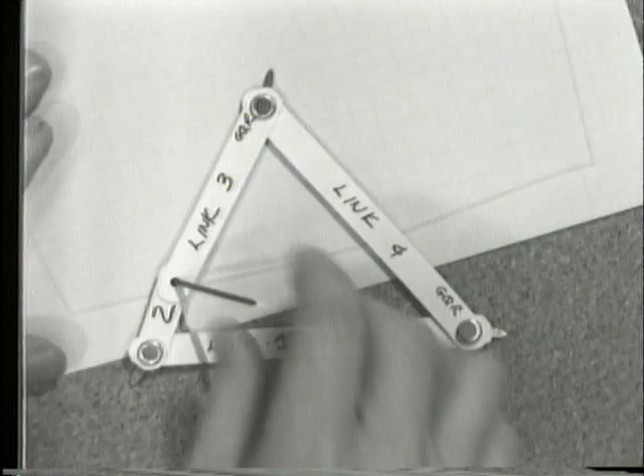Let me get it set up here, and we'll get the camera on it. See if I have it there. That's not too bad. Let me stick this down here.

Now, what we have here is a little 4-bar linkage, which you should be familiar with from your earlier lectures or tapes in ME 2310. I've labeled them link 1, which is the ground link, link 2, which we'll call the crank, link 3, the coupler, and link 4, the rocker.

That's the simplest and most basic 1 degree of freedom mechanism that you can have. Now I'm going to articulate this by putting a nail in that pivot and holding the nail with the pliers to keep my hand out of the picture.

And I'm going to move the crank in its motion. It's stubbing its toe on the fasteners there. And you can see that the crank can make a full revolution.

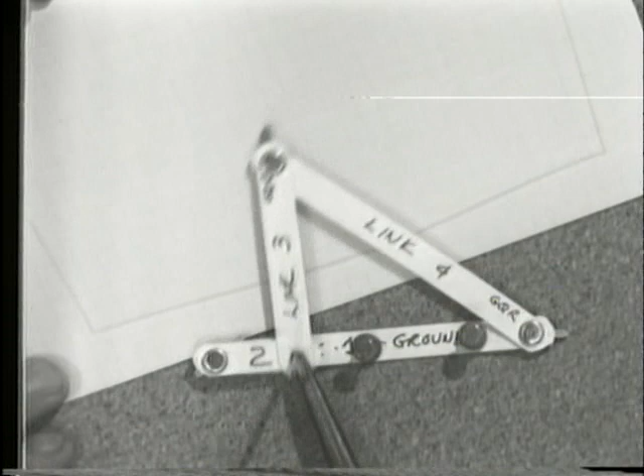This is a Grashof 4-bar linkage. If you don't know what a Grashof linkage is, you ought to go read the text about that. It's very important to understand why the Grashof criterion predicts that this will, in fact, make a full revolution.

Notice that link 4 is oscillating back and forth. That's called the rocker. I want to stop this in that particular position, which is the extreme position of link 4, and make a mark right there. Now I'm going to move it around to the other extreme position of link 4 and make another mark.

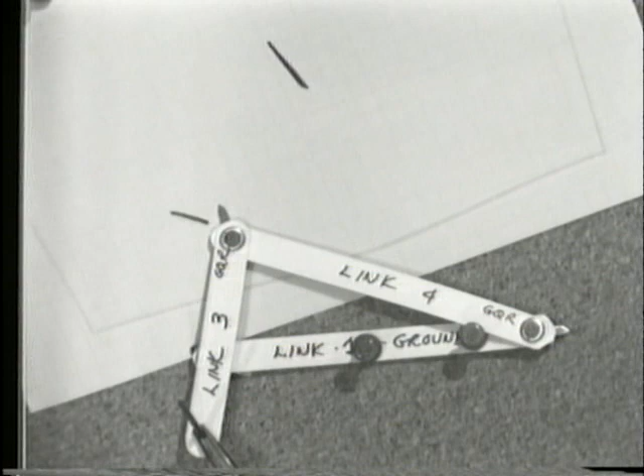While I'm doing this, make note of something you should already be aware of, namely that in the extreme positions of link 4, this position and that position, links 2 and 3 are collinear. Notice that they are on the same straight line. That, in fact, defines the extreme positions of link 4.

Now, notice the motion of link 2 as I move it from this position. We'll call that the far position of link 4 back to the near position of link 4.

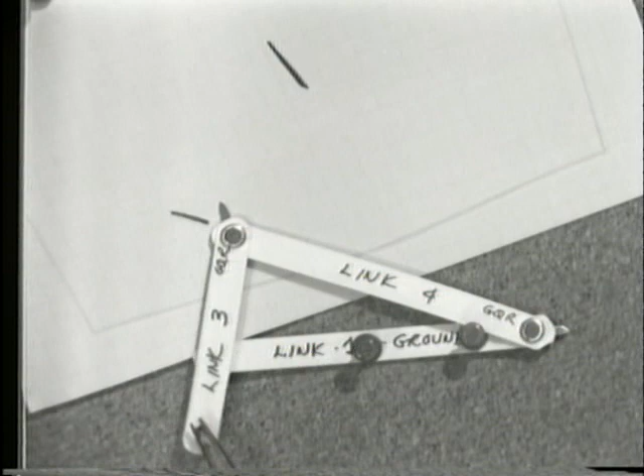Now, I think I may need to bring some paper around the other side so that I can make a mark here. Let's slip a piece of paper under there. I also want to make a little mark right down here. Get that in the right position.

That's in an extreme position of link 4. I'm going to make a mark for the position of link 2. And I'm going to move back to the other extreme position of link 4, and I'm going to make another mark right there.

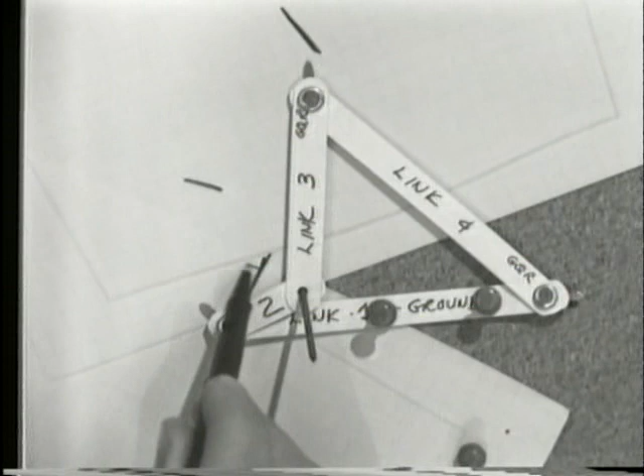Now, this does not have a very extreme quick return action, but what I want to demonstrate here is that this angle of crank rotation, which I'll call beta, is not 180 degrees. And if it isn't 180 degrees, then its supplement over here can't be 180 degrees. In fact, alpha is less than beta. And that's what makes this a quick return mechanism.

You see, when link 4 moves from one extreme of its possible positions to its other extreme, the far to the near, link 2, which is the driver, perhaps being turned by a motor in a real case, does not go through the same angle.

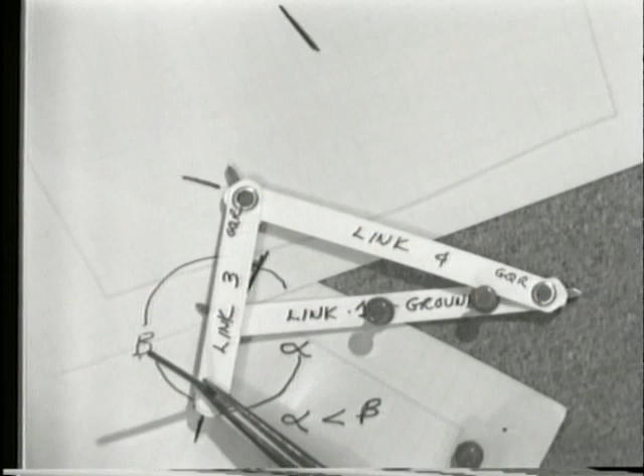If I'm driving link 2 with a motor running at constant speed, then running it through a larger angle takes longer time. So if I rotate link 2 in the direction I'm now rotating it, clockwise, then it takes longer to get from the near position of link 4 to the far position than it takes to get from the far position back to the near position, simply because link 2 is going through a smaller angle on the return trip. That's where the linkage gets its name, quick return. It does a quicker return from its far position to its near than it takes to get over there.

Now, all kinds of applications for this exist in machinery, such as moving a part from one workstation to the next, during which time you are not doing any work on the part, therefore you would like to get it there as fast as possible, and then perhaps moving the part in the other direction under a controlled condition so that you get an appropriate velocity profile or some such.

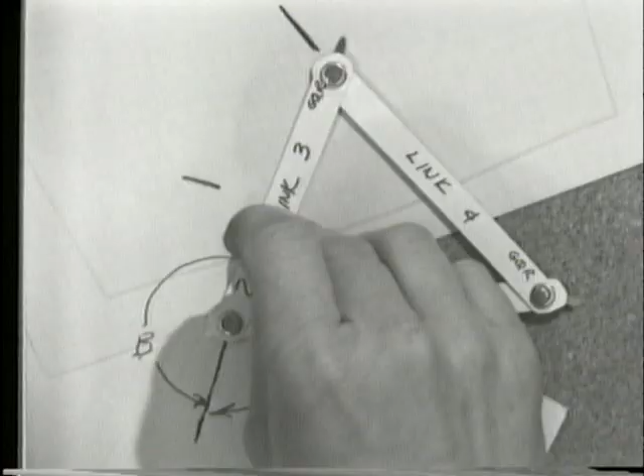So you quite often want to do work on the part as it moves from one position to the other, and just get it back. Perhaps the carrier is empty by that time, or you've dropped the part and want to get back and pick up another as fast as possible. Now, as you can see, there isn't a very extreme ratio of quick return here, and the kind of linkage I'm showing you is somewhat limited in that respect.

I'm going to show you two types of linkages here that will give you a quick return, one of which is a little bit simpler but has some limitations, and the other one is more complicated but does offer some advantages in terms of its ability to give you larger time ratios.

So the first one I want to describe is this Grashof 4-bar quick return mechanism, which is the one I was just demonstrating to you.

That will have a time ratio, which we'll call Q, which can be defined as the time it takes to go forward—and by forward I mean motion of link 4, let's say arbitrarily to the right, we'll call forward, and call this back—over the time it takes to come back, also stating that the omega of the crank is a constant, K.

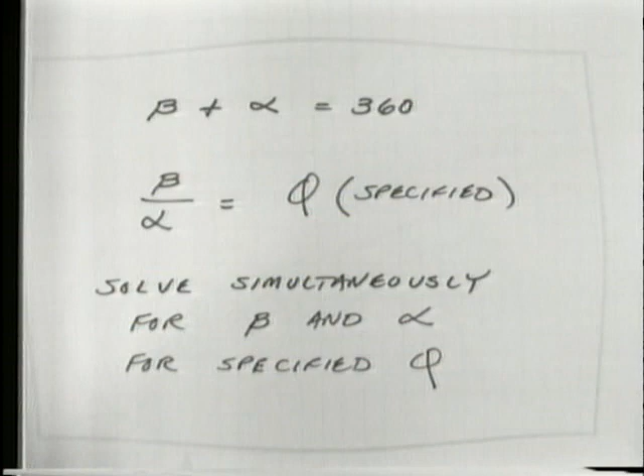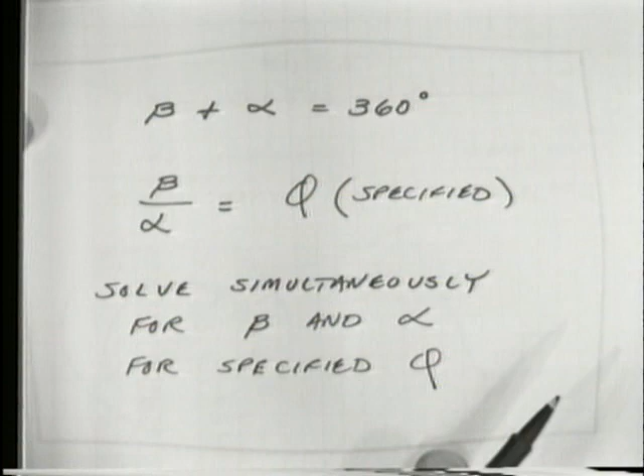That's a very simple procedure, since it's obvious that the sum of beta and alpha must be 360 degrees, since they together comprise one rotation of the crank. Also, since from the definition of the time ratio, beta divided by alpha is the value of Q that you would like to have, and that's your choice, you can solve those two equations simultaneously, and you're going to have a value of beta and a value of alpha appropriate to your particular case.

Now, the advantages of this particular approach, namely the 4-bar Grashof quick return mechanism, are that it's simple—there are only 4 links, it's relatively compact—but it has one distinct disadvantage. Only small time ratios are going to be possible without running into some fairly severe geometric limitations of bad transmission angles and rough running. So a reasonable rule of thumb is that you'll have to keep your time ratio less than 1 1/2, and that may not suit your purposes. But if that is acceptable to you, then it's a reasonable design approach.

So what I'm now going to do is show you how to synthesize a Grashof 4-bar linkage for a particular time ratio. And the time ratio that I'm going to use as an example will be rather small, 1.18 to 1. I'll make a note of that up here, 1.18 to 1.

And rather than take the time right now, I've already calculated that that's going to give me a nice even angle, which I'll have available on a triangle, so it'll make it easy to construct.

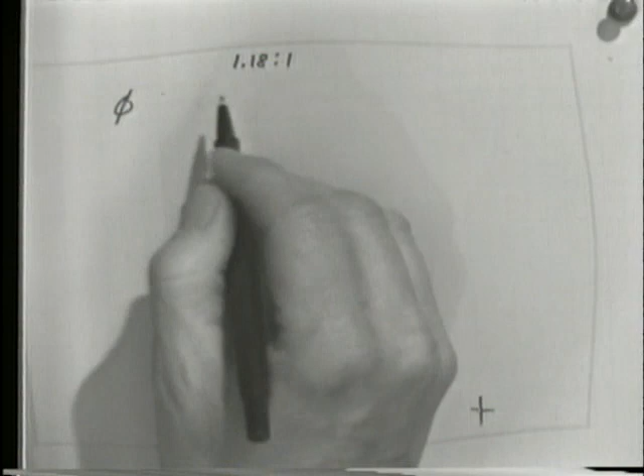And phi is going to be defined by this expression right here. Q is our time ratio, and that's, as I said, 1.18 in this particular case. This relationship will allow me to determine the angle phi.

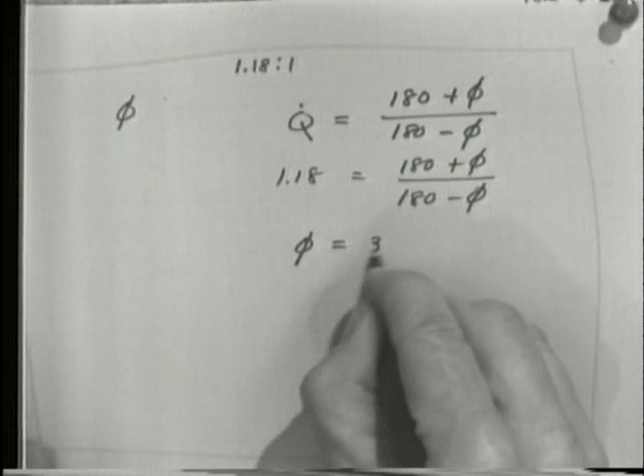Very simple relationship. So if I substitute in my 1.18 for this, I'll leave it to you and your calculator to satisfy yourself that my answer is correct, but phi should turn out to be 30 degrees, which is convenient if I'm going to use a triangle to do the construction here. But you appreciate that you could choose any value of Q that you wanted up to the reasonable rule of thumb of 1.5 and get the appropriate angle of construction here.

Now, having determined this value, let me show you how to go about constructing the linkage with that particular ratio.

Now, where do you start in a design problem? That's always the most difficult decision to make. You don't have enough information in any typical real-life design problem, so you have to make some assumptions. And you usually will know enough about your desires or the problem at hand that you can make a reasonable stab at a start to the problem.

What I'm going to suggest here is that we invent a situation in which, for one reason or another, we've decided that we would like the output end of our linkage to move through an angle of 30 degrees, let's say. I'll pick that because I have the triangle available, but it could be anything you like.

Now, I have to pick a pivot, and I'm going to pick a point right there on my sheet. Having done this in advance, I'm going down to the lower corner to make sure I stay on the paper, but you could literally choose it anywhere. If your paper was big enough, you wouldn't have any problem finding the proper locations of all of the other things.

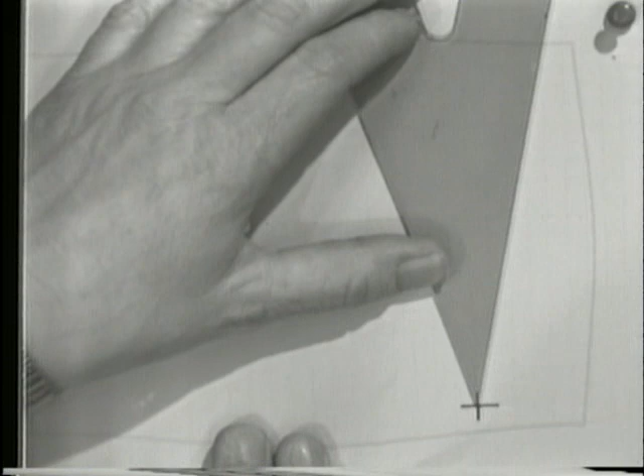Now, since I said I wanted 30 degrees of motion, let me show a little pin there. This is going to be a pivot for my output link. And notice another thing here, which is fairly common in designing linkages, in that I'm starting at the output end and working backwards.

This happens largely because you tend to know more about what you want the output end to do than you do the input end, since that's the business end that's going to do the work for you, and you would like to have it end up being something suitable to your machine's needs.

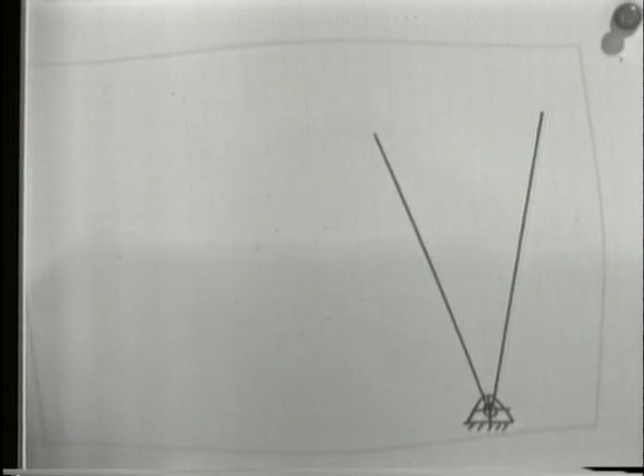I'm now setting my compass to a particular radius, which I'm choosing arbitrarily. But again, this radius, which is going to define the length of link 4, I've just drawn link 4 here. I'll darken that arc in because the pencil doesn't show up too well here.

And I'll have to give these some labels here. Let's call this point B1 and call this point B2. It's the same point in two different positions of the link. And I'm going to add some meat to that link so it will look a little more realistic. So this perhaps would be a hunk of metal with holes drilled at either end, and it is link 4.

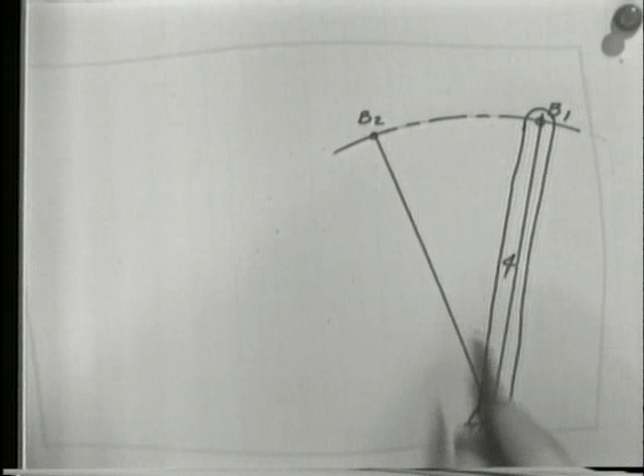Now, up to now, everything I've done is entirely arbitrary. I've chosen the angle 30 degrees through which the output link is going to move because that's what I wanted. And I've chosen the length of link 4, this distance from B1 to—we'll have to give this a name down here—call this O4, the pivot of link 4. I've given those dimensions here quite arbitrarily, but your machine packaging would dictate in the real world just what those should be.

Now, having made that much of a stab at my design, at least I show the output end, and this being my rocker, I want to force it to go from B1 to B2 and back to B1 and so forth forever and ever. However, since we're after a quick return, which direction I call return and which I call forward is quite arbitrary as well. Let's say that that's the return and that's the forward. So I wanted to come back quick and move forward slowly, back quick, move forward slowly, and so on.

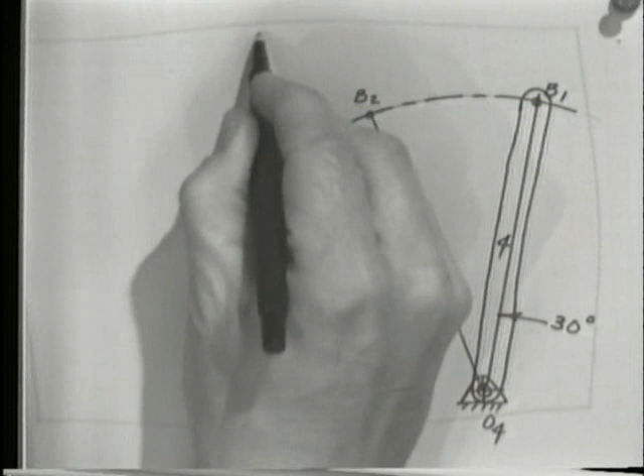That's the ultimate aim. And the ratio, I've decided I want to be 1.18 to 1. So it's going to take 1.18 times as long to go forward as it takes to come back.

That's what that means. The next step is to utilize the angle that we just calculated, and I'll refresh your memory as to what that was if I can find it here. I don't see where I put it very quickly, but that was the calculation I did for the angle called phi, which is equal to 30 degrees in my particular case. Well, I think it's under here. I didn't move it. There it is right there. Can you see that?

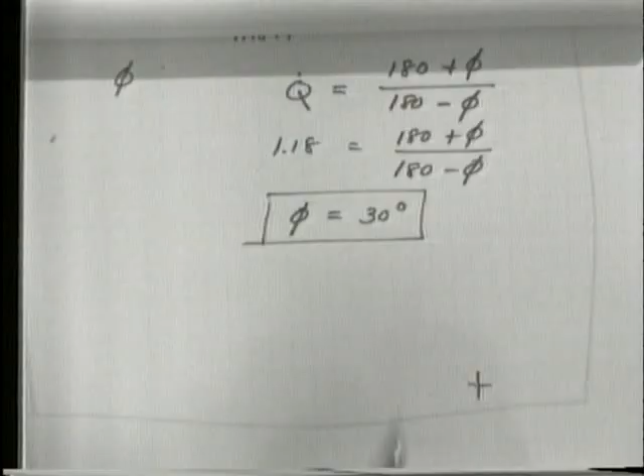This came out of the time ratio of 1.18 to 1, substituted into this formula and solved. There's only one variable in there, phi, and it's 30 degrees. Okay, back to our diagram. Now what I'm going to do is also quite arbitrary. I'm going to draw a line, any old line, and theoretically you could make this work by literally drawing any line.

Some will work better than others, and I'll take advantage of a little experience here and make it go off to the left, which is as much because I have paper available there as anything else.

That line now is a construction line. It isn't really part of our linkage, at least not yet. I've chosen it at a relatively arbitrary angle. It's not too far from 90 degrees to this position of the link, but that isn't required. It doesn't have to be a right angle.

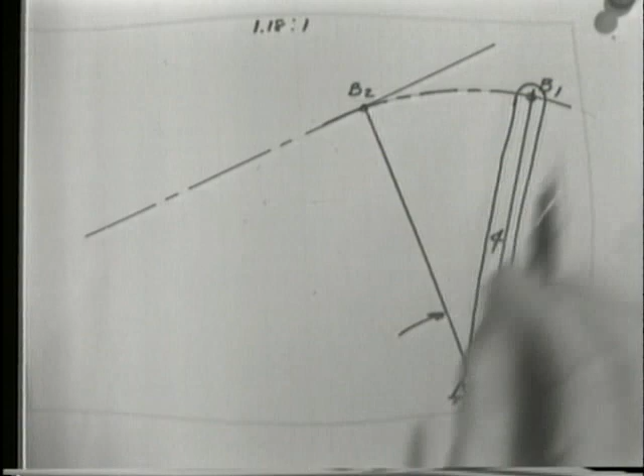The angle phi is now going to be used to draw a second line, which is going to pass through B1, which is the same point in the other position. This second line passing through B1 will subtend the angle phi with respect to the arbitrary line I just drew. So that means I need

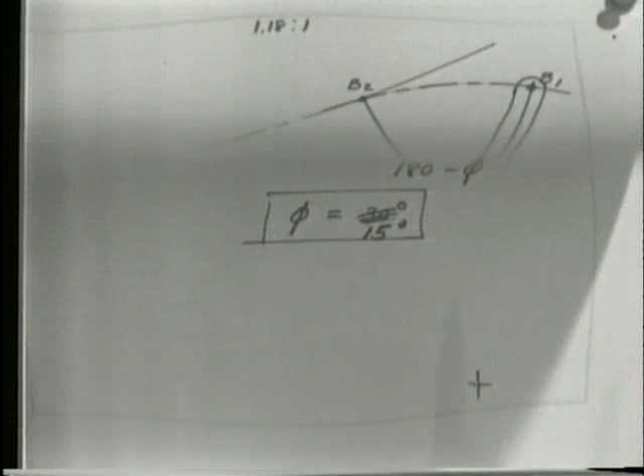to construct a line at not 30 degrees. I just noticed that I read the wrong number. I beg your pardon, that is 15 degrees. If those of you who were quick enough with your calculator between the time I showed you this and this point have caught me, you know that this angle phi for 1.18 ought to be 15 degrees, not 30 degrees. Sorry about that, but we're on the right track now.

With a 15-degree construction angle and a 30-degree triangle, I have a little bit of a problem here. But what I can do is draw a line that is at 45 degrees to this line right here. I also happen to own a 45-degree triangle, so that's fairly convenient.

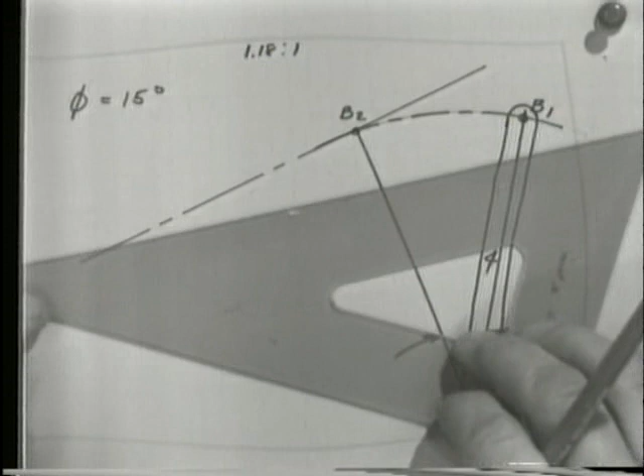I'll draw a 45-degree line down here, and I'll use that as a base, as a reference, to lay my 30-degree triangle on. Notice down here I'm just going to use that as if it were a straight edge. And I'm going to put my 30-degree triangle along that line and move it along until the other side, the 30-degree edge of the triangle, goes through B1.

Since 45 minus 30 is 15, this angle right in here is 15 degrees, which is my phi. Now, phi is not an angle that's going to appear on our linkage. It's strictly a construction aid. And I used that angle phi, which came out of the calculation of that formula,

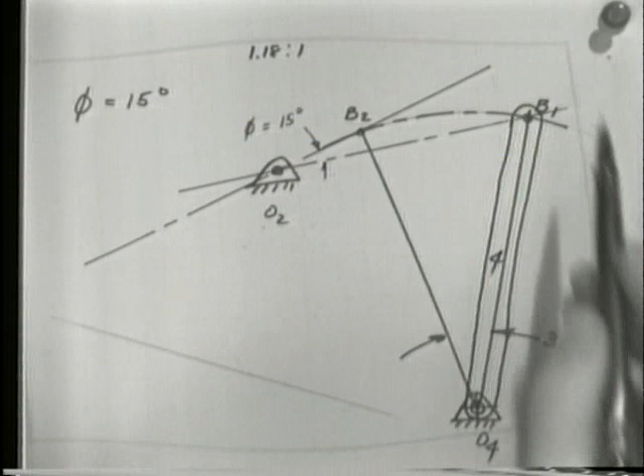to find this intersection right here, which is going to be the pivot for link 2. So I'll label that O2. Now, that pivot O2 is where link 2, the crank, is going to pivot to ground. How did I find it? I simply drew an arbitrary line through here and another line, not really arbitrary this time, but a line at 15 degrees to the first arbitrary line through B1. Where they intersect is point O2.

The next step is to find how long the crank should be. Remember the demonstration at the beginning of this tape, which I'll redo right now very quickly to refresh your memory,

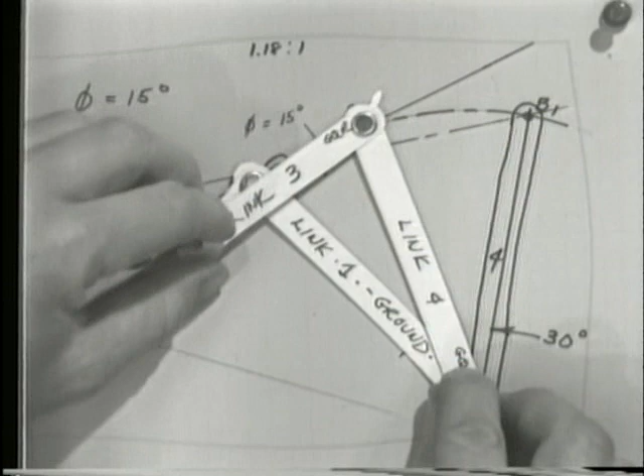which said that when link 4 is in its extreme position, 2 and 3 are in line, they're collinear. And when link 4 - I should do it this way, I guess. That corresponds more or less to what we've got. And when link 4 is in its other extreme position, 2 and 3 are again collinear. So I can make use of that condition of collinearity now to find the length of crank.

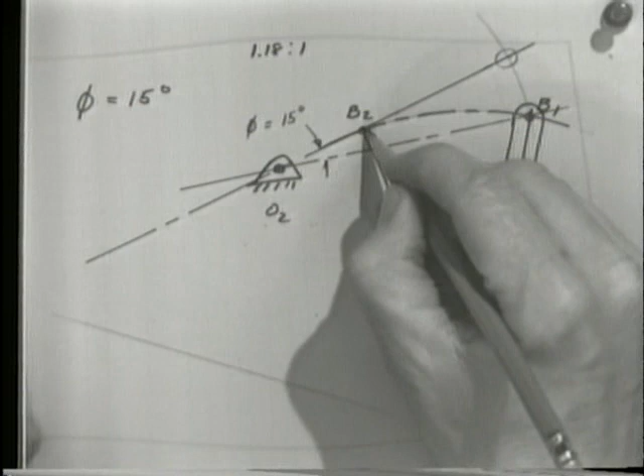And the way I'm going to do that is as follows. I'll take the center O2, which is my crank center, set the compass to B1, to the length O2 B1, strike that off as an arc until it intersects over here on the line O2 B2 extended. Now all I've done is projected the distance O2 B1 around onto the line O2 B2. The purpose of that is to determine this length right here.

We've got to give this a name, I guess. Let's call this C, construction point C up here. The distance B2C, let's write this down over here, B2C is equal to 2 times the crank length. I'll call that R2 - it's going to be link 2, and it's the radius of link 2. So if this distance B2C is twice the crank length, then all I have to do is bisect that line.

And you should remember how to bisect a line with nothing but a compass and a straight edge, a la Euclid. So we'll just draw a couple of arcs. I'll do this in pencil since we don't really care about the lines other than to find this point right there.

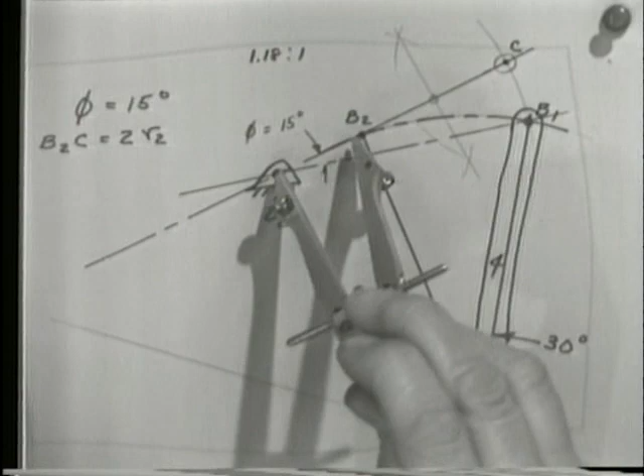I'll bisect that line. Now I can set my compass to the distance, which is half of B2C. That's going to be my proper crank length. And now I will draw around my crank center O2 that circle, which represents the locus of the end of

crank 2. So at least now I have the radius of crank 2. The only thing remaining to be determined, since I have link 4, I have the length of link 2, and I have link 1, do I not? Where is link 1? Link 1 is the ground plane, the paper. And if I have found the location of the pivot O4 and the pivot O2 on the ground plane, then the distance between them, which I will draw in as a dotted line here, is link 1.

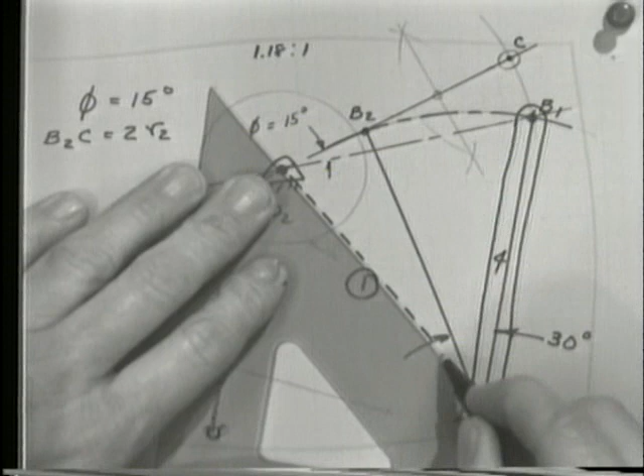It is a 4-bar linkage. Often we draw them looking as though they have only 3 bars because the fourth bar is the thing on which we're drawing it, the paper or the ground plane. So I have link 1, I have link 4, I have at least some information about link 2. What remains is to determine link 3.

Well, again, we have to make use of the relationship that says that the extreme positions of the output link 4 are determined by the situation in which links 2 and 3 are collinear. That's one arrangement, and flip it 180 and you've got the other. So I can take advantage of that relationship to note that when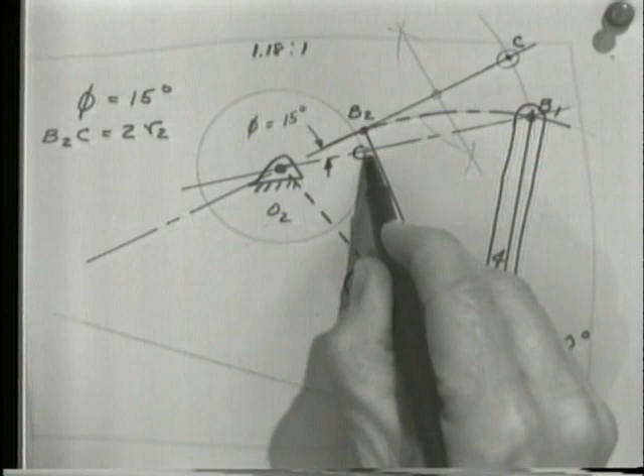link 4 is over here at B1, since link 3, being the coupler or connecting rod, connects 4 to 2, and since the locus of 2, the end of 2, is that circle, and we have to be collinear, then that point right there is the connection between link 2 and link 3 for the position shown of link 4 over here. I'm going to draw that in solid. So for the position shown for link 4, here's my link 2 and link 3. There's 3 and there's 2.

Notice that 2 and 3 are collinear when 4 is in its extreme position. Why is that the extreme position? Because that's where I started. I said I wanted 30 degrees of travel on the part of link 4, and I very arbitrarily stuck it there. I could have put it anywhere else. And all of this would have changed as a result.

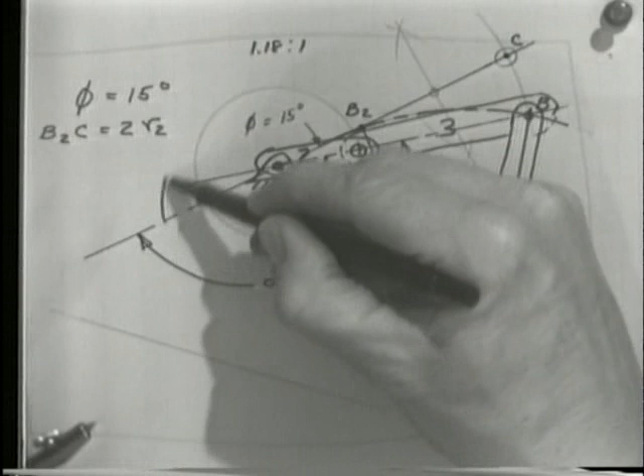Now, the other extreme position of link 4, which is point B2, will occur when 2 and 3 are again collinear. Well, in order to have my time ratio of 1.18 to 1, notice here is my alpha, and here is my beta from my time ratio.

And alpha, or beta over alpha is the way I had it, is 1.18. And you can check my geometry on that. If I haven't made another mistake, it should be that this, when this angle is 15 degrees, that was our phi. Beta over alpha will be the 1.18.

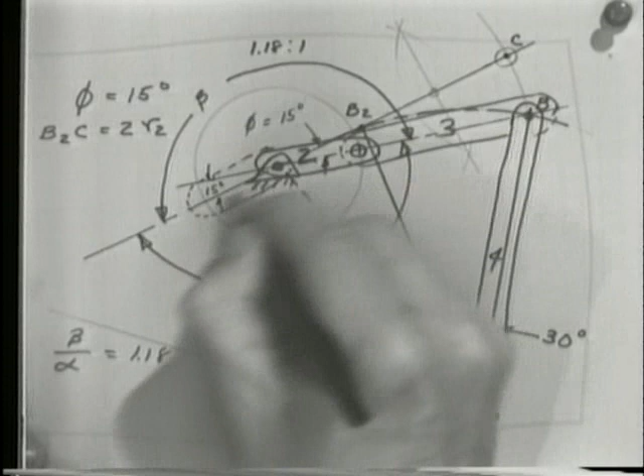Now, I want to check one thing before I give up on this, and that is that I haven't chosen an inappropriate length for link 3. I'll set my compass to link 3's length, and if, in fact, I'm going to have this beta over alpha ratio, then the other position of collinearity, namely there, when link 2 and link 3 are lined up.

It's getting rather messy in here with all these lines, and perhaps a little hard to see, but that's one of the problems of laying out linkages. This distance, link 3, since the link doesn't change length, has to be the same here as it is here, and you can see that it is within my graphical accuracy.

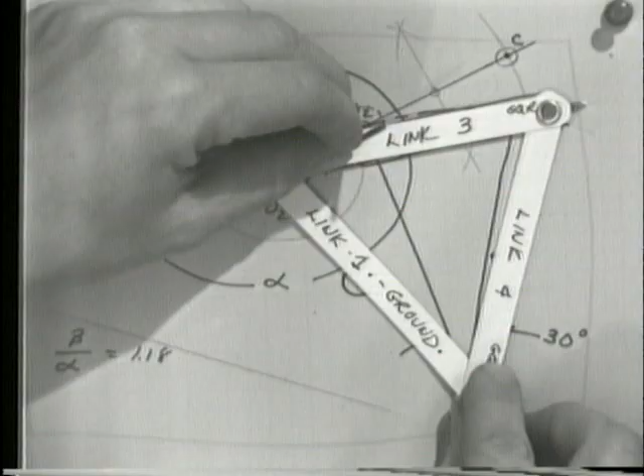So, I hope you followed that. The diagram begins to get a little busy toward the end, but I'm going to go back now to our model and show you that we do in fact have something very close to what we started with. I won't guarantee that it's exact, given some of the arbitrary choices that were made.

Remember that I drew the line B2C very arbitrarily at the beginning, and I may have done that a little differently than when I made this model, so I expect there'll be a little bit of error.

But here we have, I think I have to move this pin. It's getting in its own way. And I'll get my pliers to get my hands out of the way, and we'll move link 2 around in a circle and see that in that extreme position, link 4 is approximately where we have it on the diagram, and in that extreme position, it's approximately in the rightmost position. There is a little error there between my drawing and my model.

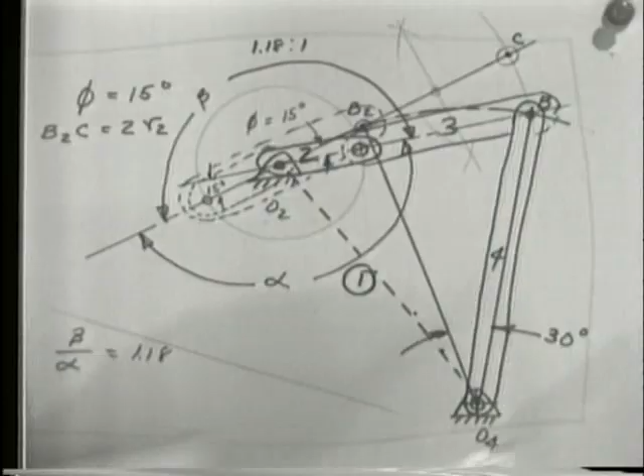And we have our Grashof 4-bar quick return mechanism. Construction method is very simple, very straightforward. It's taken me about 3 times as long to talk my way through it here as it would actually take for you to do it sitting down with a compass and a piece of paper. And I'd like you to try to do that.

This same technique is described in your textbook, Shigley, in Chapter 10, so you can look that up if you would like. Now I'm going to move on to a somewhat more complicated, but not tremendously more complicated, but quite more powerful kind of quick return mechanism, namely the 6-bar quick return.

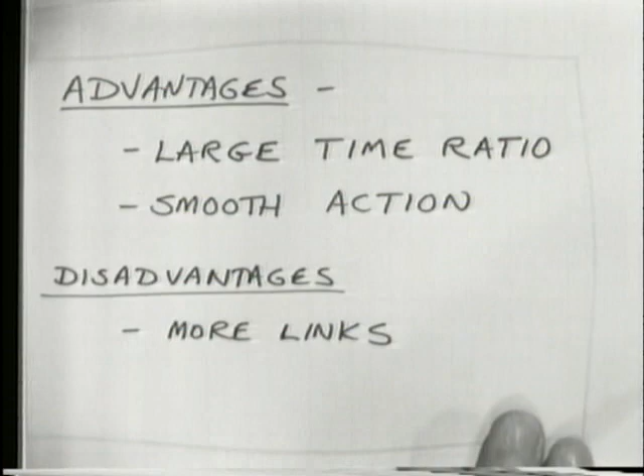And you can figure out what it's going to have by its name. But here are some advantages and disadvantages. This is capable of a large time ratio, even up to 3 to 1, although it may not run quite as smooth at 3 to 1 as it will at 2 to 1. It'll have smooth action despite the large time ratio, and the only disadvantage is that it's more links. And it's only 2 more links, and links are not that expensive to make. All you do is drill a couple of holes in a piece of metal or other material, and you have yourself a link. So that's not a very severe disadvantage.

Now, I want to, again, show you the end result before we go through the construction. So let me try and do that, and this is going to be a little harder to do with these models, but we'll see how it works out.

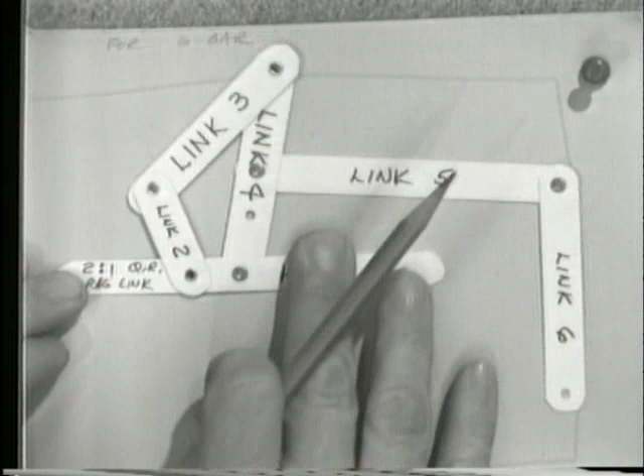For the moment, I'd like you to pretend links 5 and 6 aren't there, and I'll speak to those subsequently. If we don't have link 5 and 6 yet, we have a 4-bar, which is the same as we just went through. It's a different 4-bar linkage, however: 1, 2, 3, 4. 1 again is the ground plane, 2 is a crank. This is a Grashof 4-bar. Links 1, 2, 3, 4 comprise a Grashof 4-bar. But it's a different inversion of the Grashof 4-bar. It's the inversion in which the shortest link is grounded.

And I'm not going to tell you what that's called. I want you to think for a minute about what the name of that linkage is, which you should remember from our discussions on Grashof linkages earlier.

I'm going to put a nail in this so that I can turn it, and I'm going to have to hold it up in the air because, well, I won't tell you why. You'll let you figure it out. Again, we're pretending link 5 is not there, but we have a little toe stubbing problem, but we'll get it around. The nail is catching. Maybe I'm better off without the nail. Let me try it with just my fingers. Can you get the camera on that?

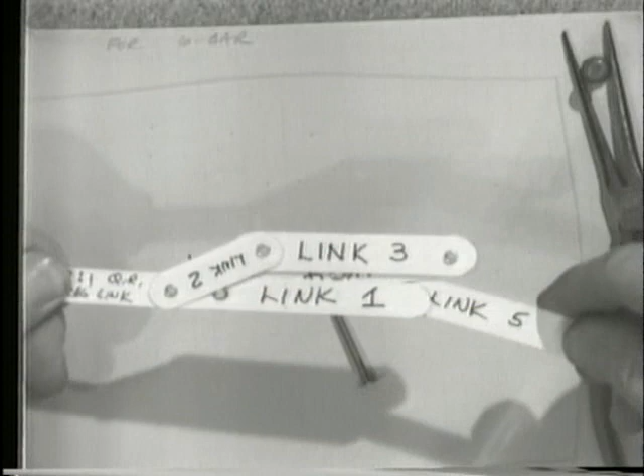There we go. Now, I'm moving link. I'm holding on to link 1. That's my ground plane. And the only reason I have the big tail sticking out on link 1 on either side is to give my fingers a place to grab it. As you'll notice, I have to move my hand from one side to the other in order to get the thing to go around completely. Well, do you know what that is called?

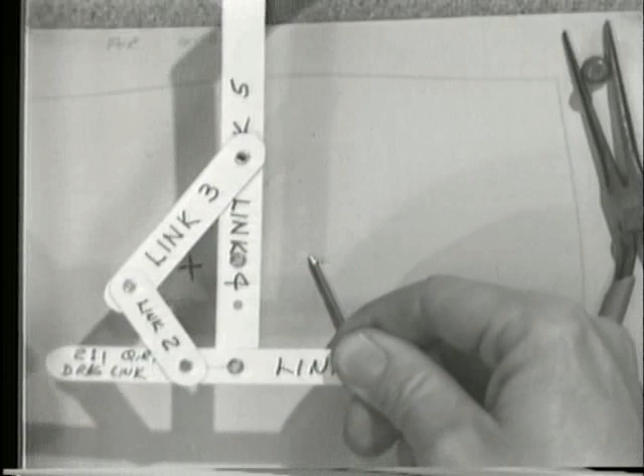Actually, I've kind of given it away because it's written right on it. That's a drag link mechanism, also known as a double crank. It's a Grashof double crank, the inversion in which the shortest link is grounded. And that has the feature of having two cranks. In this particular case, link 2 is the driving crank and link 4 is the driven crank, but I could just as well reverse that and drive it backwards if I felt like it. But the way I've designed it here, 2 is the input and 4 is the output.

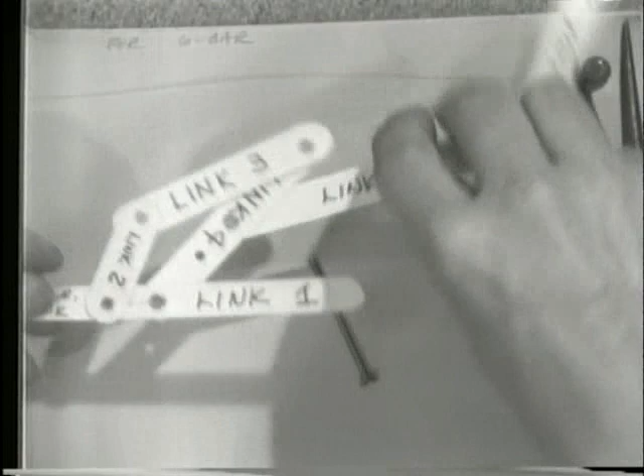Okay? So, that doesn't in itself look like much of a quick return mechanism, and it isn't yet until I add link 5 and 6. So let's now consider their inclusion here.

And I'm going to try and pin link 6 down over here on the lower right. That's going to get pinned down to the ground. And you appreciate also that link 1 is pinned down to the ground. So I now have 3 ground pivots: this one, which we'll call O2, this one, which we'll call O4, this one we'll call O6.

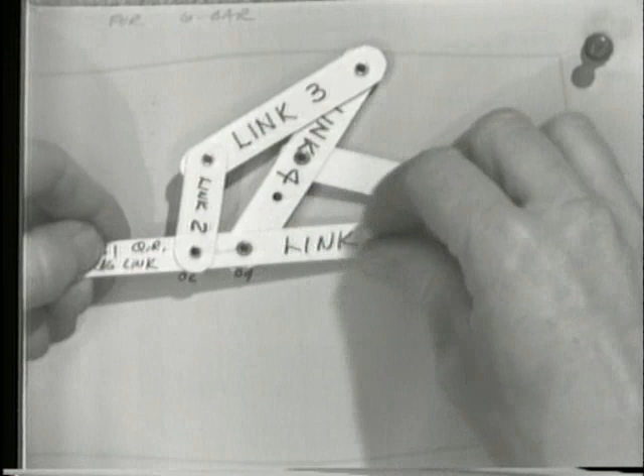Let me label them as such. I think that O2 belongs there. That's O2 right there. So we'll call that O2, O4, and O6. Now again, I'm going to have to hold link 1 up in the air because in the drag link mechanism, both of the ground pivots are passed over by the cranks. So I can't just pin the thing down to the drawing board. I'm going to move that over so we can see what's going on here.

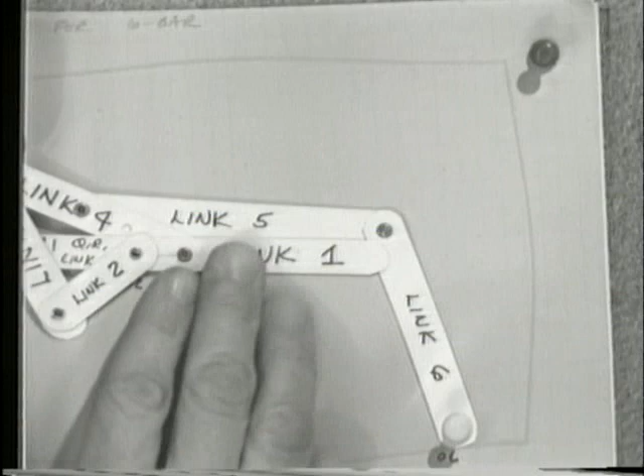Notice that link 6 is rocking back and forth, much like link 4 was on my Grashof crank rocker. Link 6 is going to be my output link, my output rocker, and that's going to have the quick return feature.

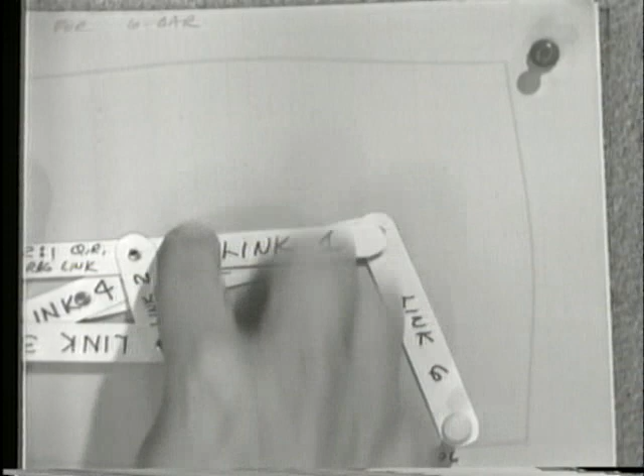So if I drive link 2 at constant speed—it's a little hard to see here because I'm having difficulty going at constant speed, with it stubbing its toe on the cardboard and having to pass my fingers from one side to the other, which makes it difficult to demonstrate.

A drag link is a very difficult model to build because the links all pass over the pivots. It's not so difficult in metal, where you can make healthy pivots, but in cardboard it's not too good. But that gives you an idea of where we're heading.

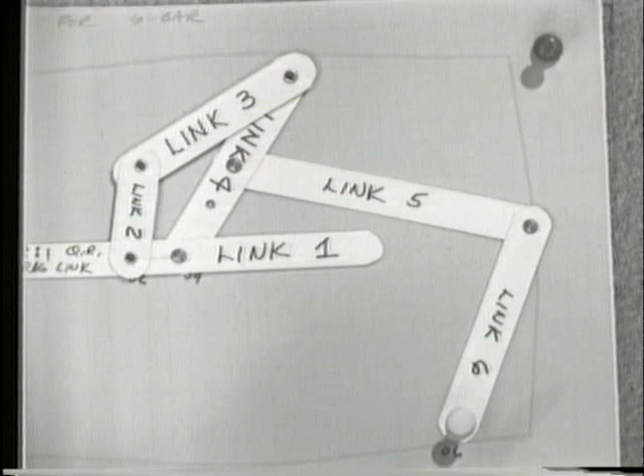So what I'm going to do now is show you how to synthesize a particular arrangement of four bars which will comprise the drag link portion of this. Having synthesized that drag link portion for a particular time ratio, all we then have to do is tack on link 5 and link 6 in any way we like. I'll show you how to do that, and we'll end up with a rocking motion on link 6, analogous to the rocking motion on link 4 on the other mechanism, and there will be a quick return. I'm going to use the example of a 2-to-1 quick return ratio,

which is larger than you can achieve with the other method. This method is a little more complicated, and there's nothing in your textbook on it, so you might want to take some notes. Better yet, if you have a compass and straight edge and some paper with you, you can follow along and do the construction with me.

What I'm going to do is set my compass to a very arbitrary length, which is going to represent the radius of link 2. That can literally be any length that I like.

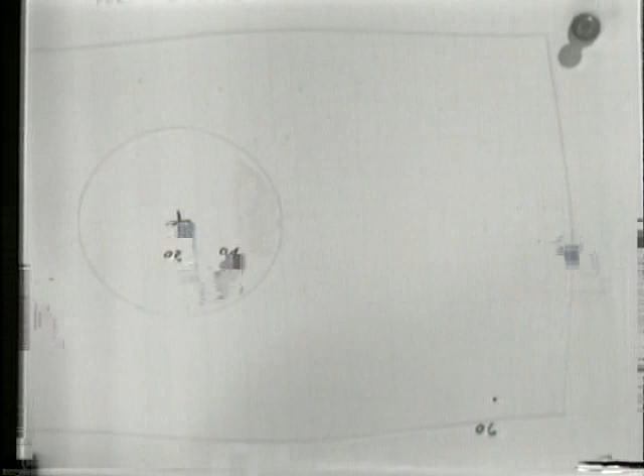Another feature of linkages in general is that they are linear. I can multiply the lengths of all the links in any of my linkages by any constant, and I still have the same kinematic linkage—the motions will be exactly the same. The velocities and accelerations will increase because the dimensions have increased, but the angular positions will be the same. Therefore I can design a linkage at an arbitrary size and later enlarge or reduce it photographically, and it's still the same linkage. So I just chose a very arbitrary radius, which is going to be the locus of the end of link 2.

Let me show you what that ultimately amounts to. I have a little link 2 here, not attached to anything yet—so far all I've defined is that I have a link capable of rotating about that center. I've also arbitrarily chosen the location of O2 here, such that it will stay on the paper.

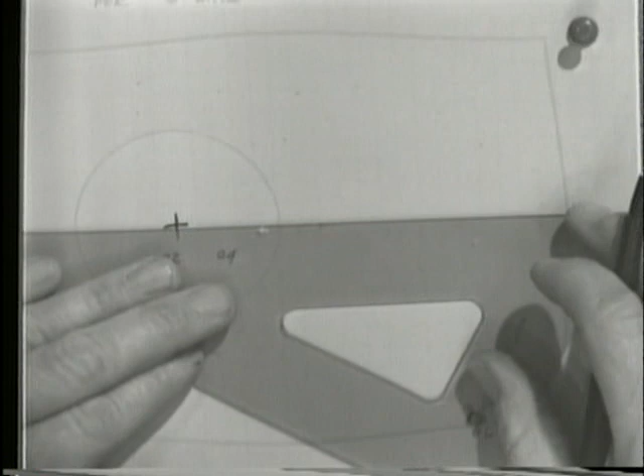Now the next step is to draw a set of axes through the center O2, mutually perpendicular axes for the sake of construction. So I'll do that, and we will use those to begin our construction.

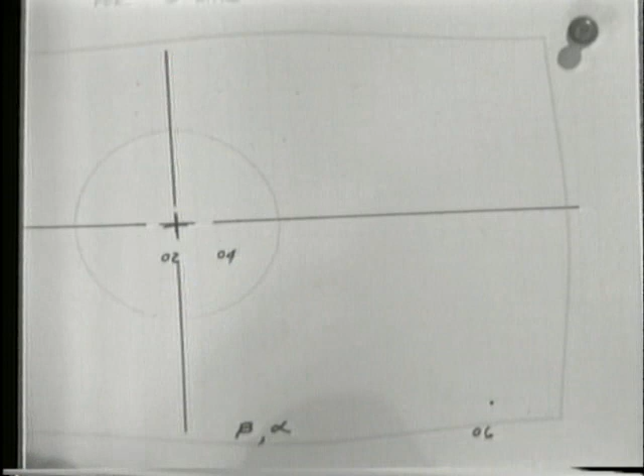Now, as with the Grashof four-bar, I have to know my values of beta and alpha, the crank angles through which this crank goes to give a particular time ratio. If I want a time ratio Q of, say, 2, then from the relationships beta plus alpha equals 360, and beta over alpha equals Q, I can solve those simultaneously—you can do this one in your head with a value of 2. You want beta to be twice alpha, and they both have to add to 360, so beta must be 240 degrees and alpha must be 120 degrees. That gives the 2-to-1 ratio, and they add up to 360.

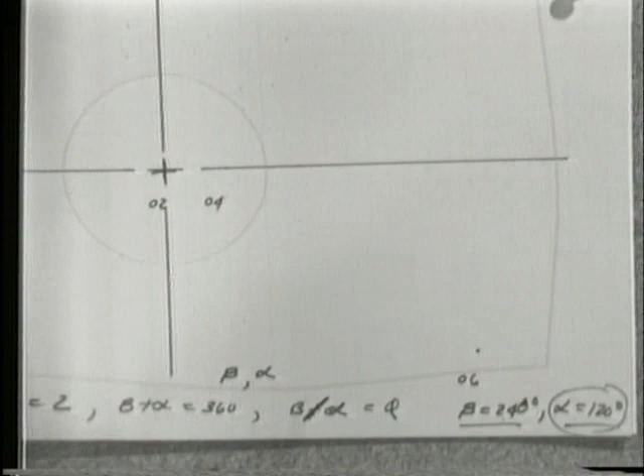So, with that calculation out of the way, I can now begin to construct this drag link mechanism to give me that time ratio. What I'm going to do is take the smaller of these two angles, namely alpha, which is 120 degrees, and lay that angle out with its apex at the center, O2.

I'm also going to, for the sake of symmetry, for no other reason, lay that alpha out such that it's symmetrical about one of the quadrants of my axes. This isn't necessary to the solution, it's just convenient. Remember, the axes were chosen very arbitrarily, so this bit of symmetry is strictly for convenience.

I should also point out at this juncture that there are an infinity of solutions to this problem. So all we have to do is pick one.

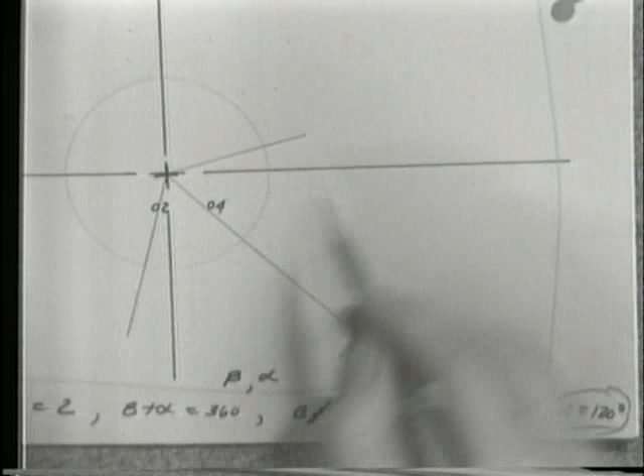So what did I just do? I bisected this 90-degree angle with my 45-degree triangle so that I could get a center line. Then I put my 60-degree triangle in there and drew a line 60 degrees from that, and did the same over here. So this angle right here is alpha, 120 degrees. And it's also symmetrical about the fourth quadrant there.

If I chose to do it about a different quadrant, all I would get is a mirror image of the solution. So I now have this line, which I'll draw in solid, representing link 2 in a particular position—namely a position that gives me an extreme position of link 4 that I can use for my quick return.

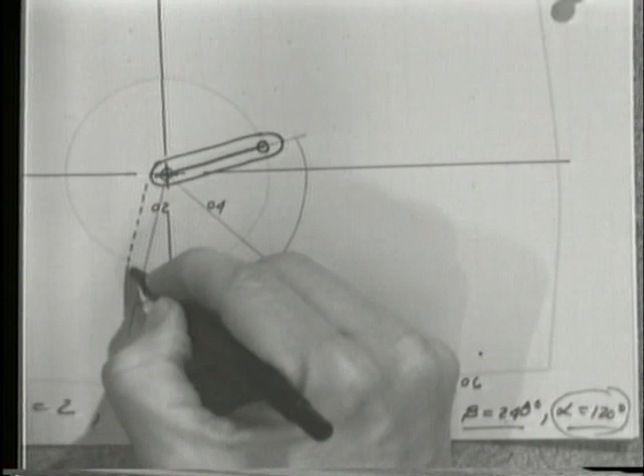And I'll show the other position dotted down here of link 2, in which I'm interested. Of course, there's an infinity of positions of link 2 because it can rotate about O2 and stop anywhere you want. So here's link 2, and this angle right here is 120 degrees.

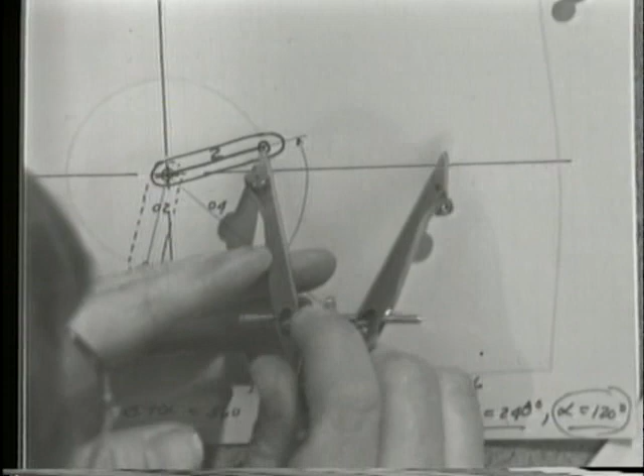So far, we've defined only one link, so we haven't really gone very far in our solution yet. The next step is to define another link length. It may seem somewhat odd that this next step can be done quite arbitrarily—and I'm cheating because I've already solved the problem and I'm picking a length that will match my cardboard model. But you can literally pick any length for link 3, and the length I've chosen is what the compass is set to.

Such that you are able to cross this axis—let's give the axis a name. Let's call it sigma to sigma prime, or something like that. I guess I got a prime on both ends—make a double prime over there. So I've got a sigma prime over there and a sigma double prime over there, just to give the line a name.

What I want to do now is find a length of link which, when attached to link 2 right there, will in one position intersect this line way over here, and in the other position, which is the magic angle of 120 degrees, also intersect. Now clearly there are some lengths that will not meet that criterion, right?

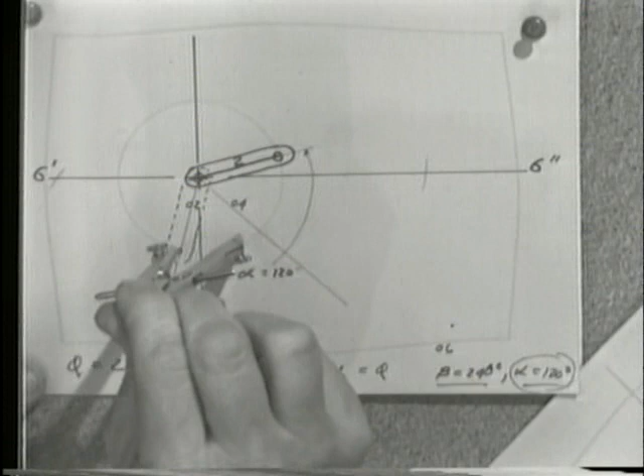If I have it too short, it isn't going to make it. This length will make it over here—I can intersect it over there, but I can't intersect it over here. So all I have to do is have it long enough. Not a very severe constraint.

I did originally pick that length very arbitrarily when I laid it out. I'm copying what I did before simply to match the model I've made, so I can show you what this looks like when we're done. I'll draw this link in now. This is link 3.

And over here, where the other arc intersected, I will draw in link 3 in its other position, which I'll draw dotted. It also developed a slight bow going from here to there, but we won't worry about that.

So I have now defined two links, link 2 and link 3, and I have them shown in two positions. This is also link 2, and O2 is that little center right in there. Two links to go, 4 and 1.

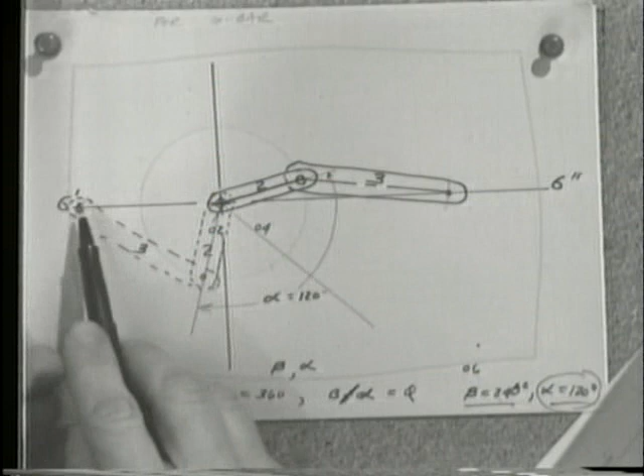What I probably haven't made clear in terms of where we're headed is that this construction, contrary to what I did before on the other linkage, is starting from the input end and working toward the output, but is nevertheless directed toward having the output link be in two extreme positions, both of which lie along line sigma, sigma prime.

Link 4 wants to be lying along this line when 2 and 3 are as shown here, and also be flipped 180 degrees and lying along the same line when 2 and 3 are over here. Because if link 4 goes through 180 degrees when link 2 goes through 120, then it will also go through another 180 when 2 goes through the next 240. It has to, because there's only 360 for link 4 to go through.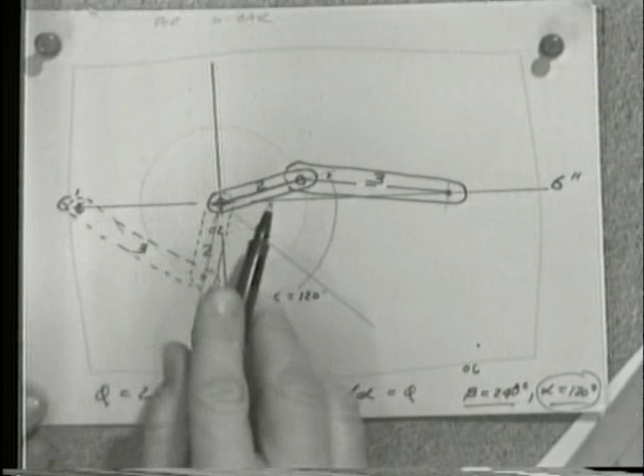So that's where I get my time ratio. When link 2 goes through 120, 4 is going to flip through 180. When link 2 goes through the next 240, link 4 is going to flip a second 180. And that's my time ratio.

So all that remains now is to find where to stick O4. Where does the pivot O4 go? Well, link 4, by definition, connects link 1 to link 3, at least by my numbering system. And therefore this pin over here, which I'm going to call pivot 3,4, which connects 3 to 4, is the same as this connection in a different position, 3,4 over here.

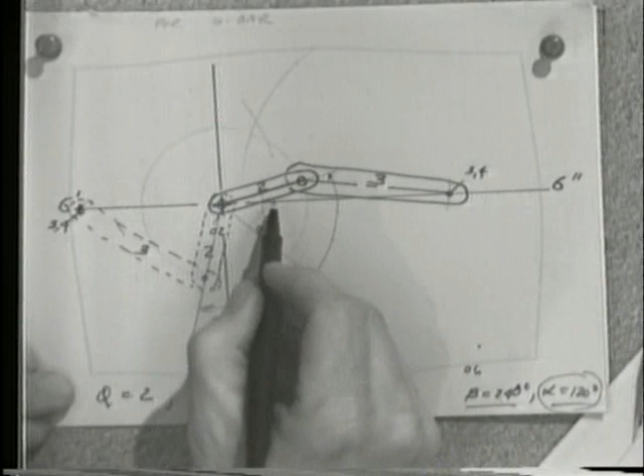So if I have the constraint that link 4 must, for both of the positions shown, lie along the line sigma, sigma prime, and also connect to pin 3,4, then I think it follows - I know it follows, but I hope you agree - that if I bisect that line 3,4 to 3,4, using the same Euclidean technique as before, we just drop a perpendicular there and find that intersection, which is the bisector of this line. That is the pivot O4.

This is the pivot O2, where we started. And here again the drawing begins to get very busy, because these constructions typically are done with two links lying coincident, and therefore everything is on top of one another when you're done drawing them in. There's link 4. And link 4 on the other end, still pivoted here, has to come over and connect up with 3,4.

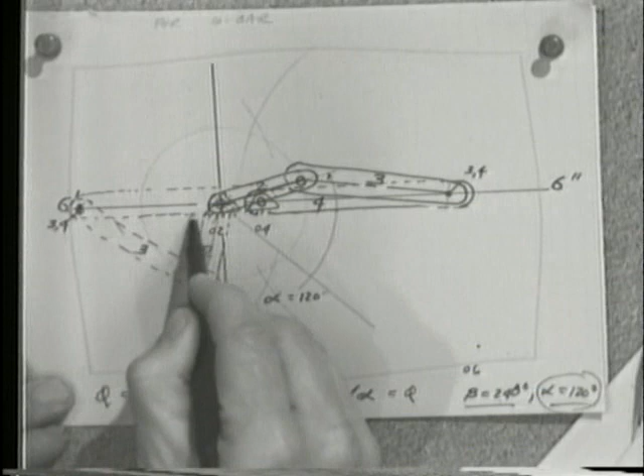Again, the linkage is being constructed in a triangular configuration such that there is an extremum present. The extremum is defined by the collinearity of link 1, which is the line sigma, sigma prime, and link 4. Those are collinear in this case. That, I hope, will be a little more clear when I put some physical links on here.

Here's where we started. Defined a link 2, totally arbitrarily - I just picked a length, what I felt like at the time. I drew the locus of the end of that link 2 as it would pivot about this center, also chosen arbitrarily. The line sigma, sigma, sigma prime, sigma double prime, as I've labeled it, was also drawn arbitrarily.

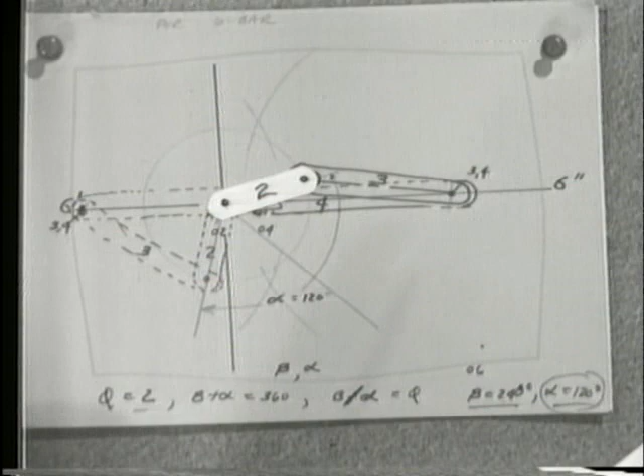The angle, which is not arbitrary - it's a function of our desired time ratio of 2 in this case - was laid out symmetrical about one quadrant. The symmetry is arbitrary; it will work even if you don't do that. You might not get quite as nice running a linkage, but that's another issue.

Link 3, its length was determined quite arbitrarily, such that it intersected the line sigma, sigma prime. Once I've made those arbitrary choices, I have now narrowed the problem down to a single solution. Remember, we had an infinity of potential solutions at the beginning.

The next step I did was to bisect the line from position labeled 3,4 over here to 3,4 over here, to find this pivot right here, which then defines the length of link 4 and simultaneously defines the length of link 1. Again, they're laying on top of one another, so they've kind of disrupted themselves.

But let me move now to the model which I started with and show you that that does in fact accomplish what we're after. Here's where we are right now. Link 2's length has been defined.

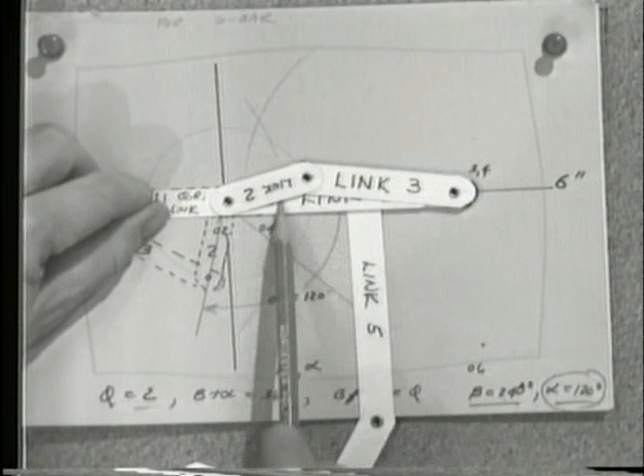Link 3, link 4, which is almost completely hidden under here until I move it. Now I will rotate the whole mess, and notice that - we're temporarily ignoring link 5 - link 4 ends up having gone through a 180-degree flip, but link 2 has only gone through 120. Now when I rotate link 4 around to where I started from, link 2 goes through the remainder, which is 240. There's my 2-to-1 time ratio.

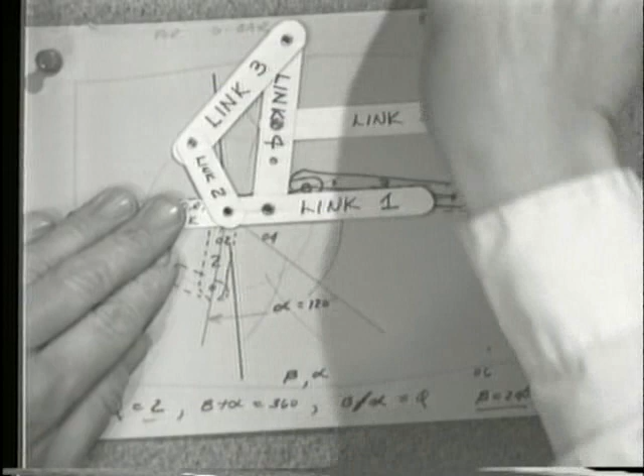So now I have my drag link, and I'm going to move it up there so that it looks a little prettier - at least you can see the links. The final step is very simple. All I need now to get link 5 and link 6 is much the same as when I started with the design of the Grashof four-bar. Namely, I choose an angle through which I would like link 6 to travel.

And I define that angle. Let me sketch that in. Let's say that I pick a pivot for link 6 down here, and I define an angle quite arbitrarily. I'll just sketch it freehand here, through which I would like link 6 to go. Call it theta 6, and that's anything I feel like.

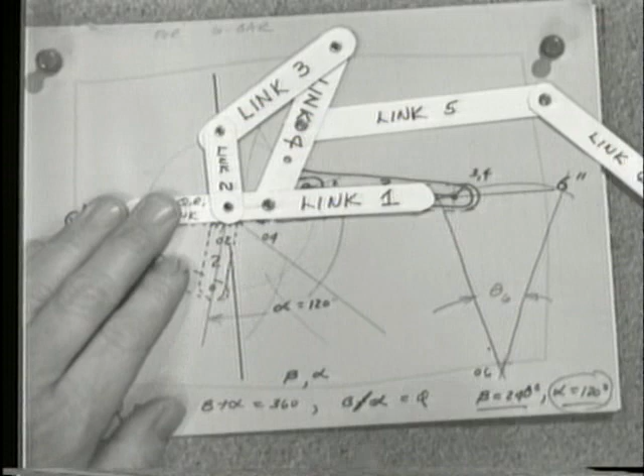Once I have defined that, notice that I put the other end of link 6 - here's link 6 right here in one position, and it's going to move over to here. The other end of link 6 is deliberately placed on the line sigma prime to sigma double prime. That's a requirement, because I want link 5 to drive link 6 to that position.

I don't have it in the same place that my cardboard is going to put it. Let's correct that. There. There's the pivot I want right there. So that when link 4 is lying along sigma, sigma prime, link 6 is all the way to the right as far as it can go. Why? Because 5 and 4 are collinear.

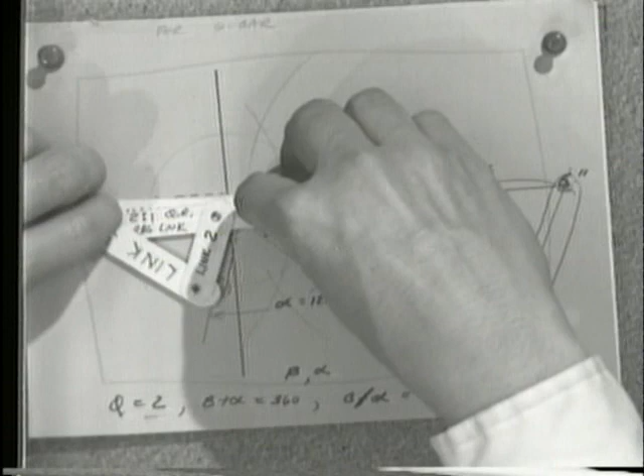Then when I continue to move link 2 around through 120 degrees, link 6 comes all the way back to its leftmost position through whatever angle I chose. And if I don't like the angle, all I have to do is move this pivot down or up to change the angle. The total excursion of link 6 is going to be completely defined by one thing, and that is this radius right here, this distance.

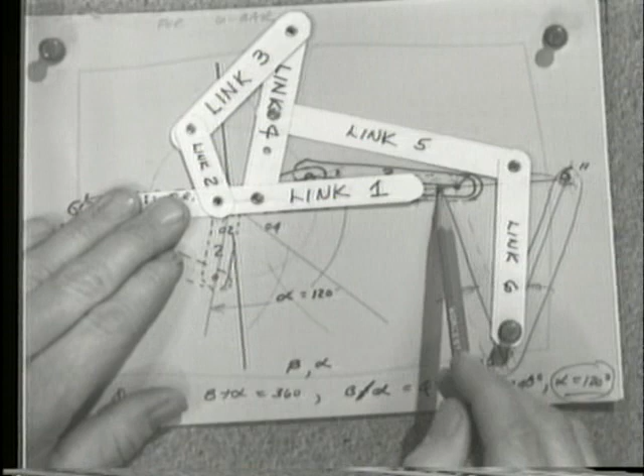Notice where link 5 is coupled to link 4? That distance right there is half of the distance that I wish link 6 to move. So all I have to do is choose an excursion of link 6 that I would like, decide on an angle. That determines the pivot. Once I've chosen the excursion, I will cut that excursion in half.

Let me move this out of the way. This is the excursion of link 6 I'm talking about, right here. Call it S6. And if I do the same bisect trick with my compass and cut that distance in half, and I take that radius, which is half of S6, and I find where that lives on link 4, right there, and I drill a hole in link 4, which is this hole right here, and I attach link 5.

Presto. I now have a 6-bar linkage which drives link 6 as the output, link 2 is the input. I stick my motor on link 2, I drive link 2 at constant velocity, one direction or the other. It drags link 4 along for the ride, thus the name drag link mechanism. Link 4 in turn drives link 5. Link 5 makes link 6 oscillate, and I have a 2-to-1 quick return.

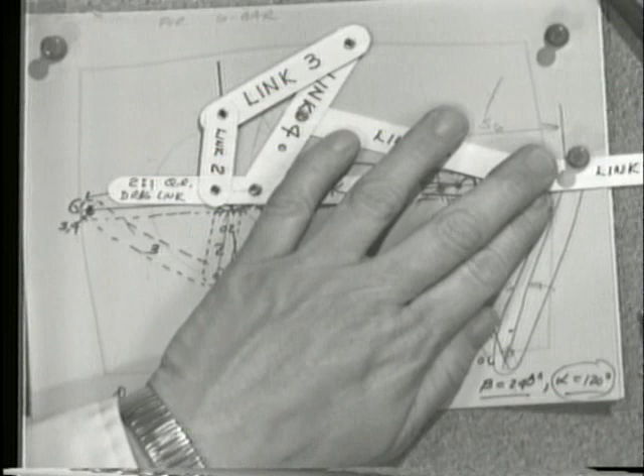Now you can also have your output on link 6 be a slider block. For example, I could, if I wished, have link 6 constrained to move in a track, in a straight line, which I'll do with some pins here. Need one more pin. And now, instead of a rotary motion on the part of link 6, I have a translating motion on the part of link 6.

Again, I'm having trouble holding everything together here because I can't pin link 1 down. I just pulled it out of my track, I guess. I can't pin down that link 1 because the pivots have to pass over it. My hands are getting in the way of everything as well. I hope you get the idea of what's going on there.

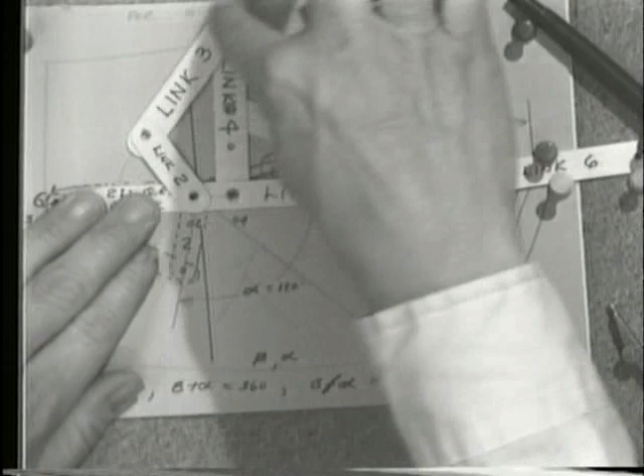So the actual motion of link 6 is quite arbitrarily defined. It's whatever you would like it to be. The quick return ratio comes completely from the geometry of the drag link, and it really is a simple exercise to lay that out to get any time ratio you like.

So to summarize what I have shown you, I've shown you 2 techniques to synthesize quick return mechanisms, one of which uses only 4 bars, but has the limitation of very small time ratios. Actually, anything above about 1 1/3 begins to become problematical, and 1 1/2 to 1 is about the largest that you can possibly consider.

The second is the one that we just went through, which is the 6-bar quick return. It's a little bit more complicated, a little harder to follow the construction, but really not that difficult, and very simple to make in metal, not in cardboard, and has very many applications in industry.

So I think I'd like you to try to make a couple of these, and you'll have a much better idea of what's involved. Thank you.